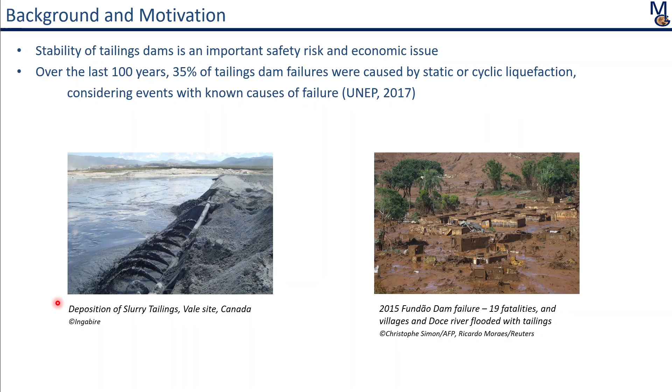And this is Emmanuel's work that I mentioned. We wanted to put a dollar amount to this, so we looked at how the assumed residual strength, if you assume liquefaction will happen in these tailings, what you can count on after liquefaction, how that assumption, which is a big question, affects the cost of remediation.

We looked at putting in a toe berm and stone columns, and for 100 meters of a dam, that's $1.5 to $2.5 million. That's an actual project, 3 estimates for cost, and that's millions of dollars. So some adjustment in that one parameter can make a big difference to the bottom line of a company.

This is kind of an old schematic of all the research I do. I've got to update it at some point. There are 2 lines of work. Basically, we look at liquefaction response. We start from element testing, modeling, and then eventually we get to some sort of a liquefaction strength against the state parameter.

On the second line, which is the main focus of the talk tonight, we look at in-situ tests. Again, going from lab testing to modeling, all the way to connecting the measurements of CPT in this case to the state parameter. And once we have those two, we can eliminate the state parameter from the equation and connect the liquefaction response directly to the CPT measurements.

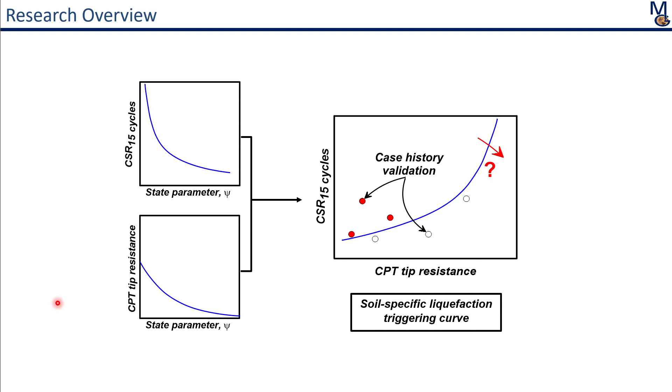And once you get there, you can also look at case histories and see if all this modeling and assumptions that you did amounts to predicting anything real. Would the past failures and not failures corroborate your findings?

I'm sure you all know this, it's 2023 and we're in Vancouver, but just for a reminder, the state parameter is the difference in void ratio from the critical state line. If you shear soil, eventually you get to critical state where there's no more dilation or contraction happening. And if you look at your current void ratio minus the void ratio at the critical state at the same confining stress, that is the state parameter.

If it's negative, if you're below the line, if you're denser than the critical state, your soil is going to dilate to failure. That means you're going to have some extra strength that you can count on. And if you're above the critical state line, positive state parameter, your soil is going to be contractive. You're more prone to liquefaction.

That's a big concern. On the right, you have manifestation of the critical state on the stress space. You have shear stress essentially on the vertical axis versus confining stress. The slope of this line between Q and P is M, the critical state friction ratio, which is equivalent to a constant volume friction angle. And M of 1.2 is equivalent to a phi CV of 30 degrees.

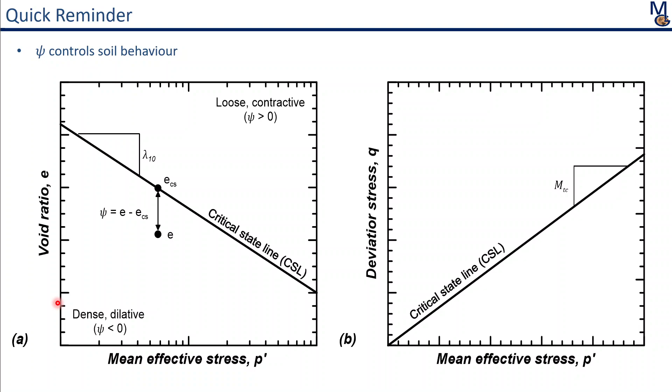That's kind of the rule of thumb number that we go with. The way we do liquefaction assessment is you go to the field, you push the CPT, you estimate the state parameter from mainly the tip resistance, and then you use some correlation between the state parameter and liquefaction resistance, whether triggering, residual strength, or something else, and use that to design or assess the conditions of your site.

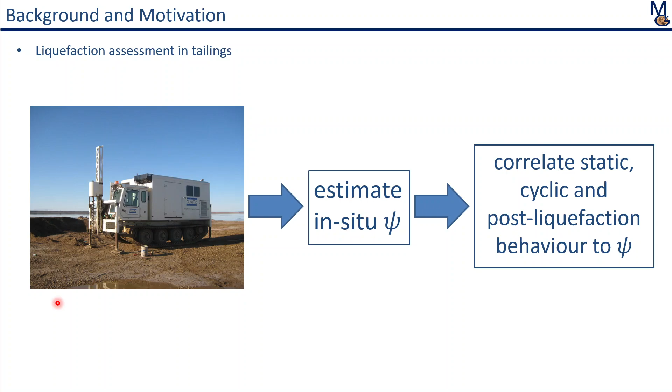This is the outline of the talk. Basically 3 parts to it. I'm sure I'm not going to make it to the 3rd part. It's a bunch of cool research stuff I put at the end. If anyone was interested, they can look at it later.

The first part is the main part of it. It's about CPT. I'm going to start with drained CPT when we do CPTs in sand. And then I'm going to give you a pretty good method ready to be used, and I'm hoping someone will pick it up and try it out and see if it's crazy or not. Then I'm going to pose some questions about partially drained penetration. That's where the big problems are. I don't have the answers, just more questions and things to think about.

And if we have time, I'll get to show some of the second part of the liquefaction assessment, how state parameter relates to some of the liquefaction resistance properties, out of the work that we did. And we're gonna close it off with that.

So the first part is, why would we need a material-specific CPT interpretation? What's wrong if we just have a general correlation and just use it?

So this is a database of calibration chamber tests. You have a big tank, 1.5 meters or so in diameter, fill it up with sand. Everyone can hear me, right? I'm a bit away from the microphone.

And you have uniform clean sands, as easy as they come, and you do some CPTs in there, and you correlate the state parameter, which you know because you prepare the sample, you know its weight and volume. And you correlate that to the normalized tip resistance. You normalize for overburden stress.

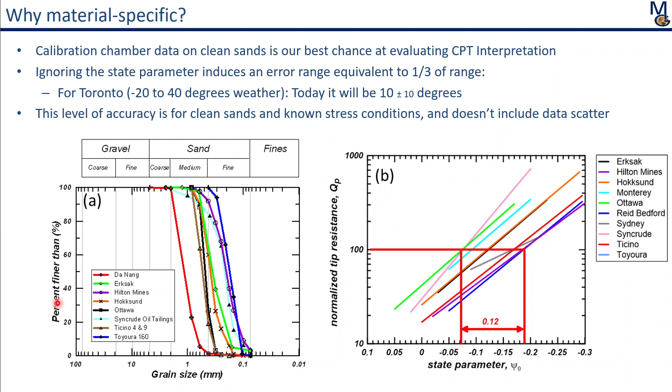And I'll show you some examples at the end, which is pretty close to that. That's where we are still. To get better than that, then you need to know which one of those lines you're on, basically. Right? So that's a big chunk of that uncertainty that you can deal with.

When we started, we looked at some of the existing methods. Those of you who do this every day will recognize some of these methods. And we wanted to see how they do on that very same calibration chamber database.

This is as low a bar as you can have. Most of these methods were calibrated against the same database or a part of it. So we just looked at how they can recover the state parameters that we knew in the database if you feed them the database. And we plotted the results on the histogram.

Basically, the error is on the horizontal axis. So you want everything to be right here at 0, no error. And statistically, you want that bell curve to be sharp and centered in the center.

3 of these methods work fine. They're basically the progressions of what the late Ken Been started with Mike Jefferies, and then the Plewes et al. method came along, and then the cavity expansion was an extension of that. The widget that some of you guys use is an extension of that. And they do fine. If you were looking for one standard deviation, it's plus or minus 0.06 or so. But it's centered around the middle, and there's no bias.

2 other methods that we looked at have big problems. One of them is the equations that's in the Been and Jefferies book. I don't know why, because they were trained on the widget, basically. They should recover the widget results. They don't—that's the brown line. It has nothing to do with the middle. It's kind of unconservative most of the time.

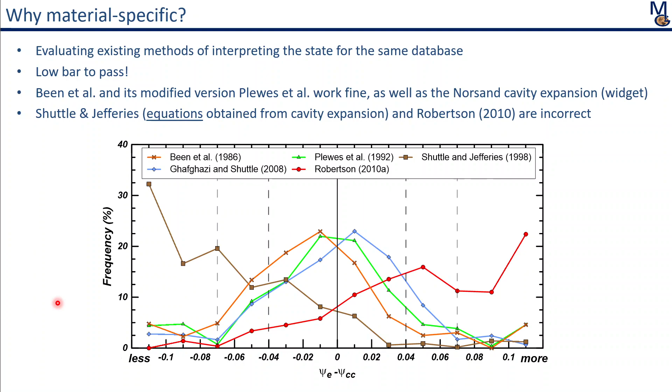The other one is Robertson's equation from 2010. That one didn't do very well either. It tends to be on the conservative side, and it doesn't really capture anything in the middle. So you're probably better off just assuming a state. And this is a very low bar—this is as easy a test as you can do on this.

So if you wanted to get to a material-specific one, do a little better, then you have 2 ways. You can do calibration chamber tests, which are difficult and expensive and messy, or you can be happy, like Mohammed here, and do CPT modeling. Doing CPT modeling, creating a model is very difficult. A lot of people, including me, have been trying for decades. But once you have a model, it's easy to use.

And you can go one step further, and you can come up with some simplified parametric equations, which you can basically use in Excel. We do both in my group: we use calibration chambers to validate the model, and we use the model to extend what the calibration chamber test can tell us.

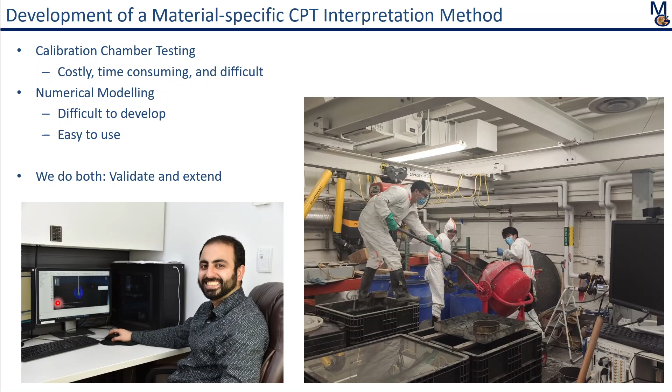To model the CPT with Norsand, we needed to pick a good software that could do this. Norsand is implemented in some platforms, like FLAC and Plaxis and others. None of those can do CPT modeling because they cannot deal with those distortions you can see in the mesh. CPT is a very difficult problem to model.

We picked Norsand as the model to represent soil behavior because it can do a good job. It's relatively simple. It has good penetration, especially in the tailings industry. It's becoming kind of the go-to model. And I was trained on it, so it was kind of natural as well.

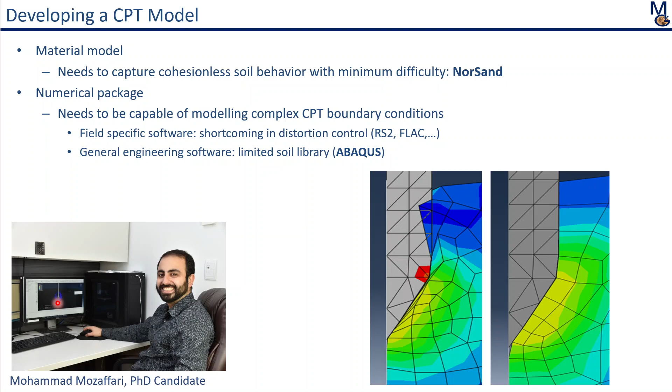So we did the other thing, which is implementing Norsand in Abaqus. That was a good chunk of Mohammad's work. We verified it, so you want to make sure your implementation was okay. This is comparing the results, loose and dense, drained and undrained, to the VBA that is in the Been and Jefferies book. So the implementation was okay.

Now that you have the model, you first want to calibrate it. It's forward prediction. We're not trying to do any monkey business going back and forth and trying to adjust the model so we get what we're hoping for. So you get a handful of triaxial tests, 6, 7, 8, something like that, and you calibrate, you get the critical state line, and you calibrate Norsand to it.

There are 5 parameters you're looking at calibrating: the critical state friction ratio, which is like a friction angle; the slope of the critical state line lambda, which represents compressibility of soil; elastic stiffness, which you can get with bender elements, or in the field from a seismic cone; chi, which is a dilatancy parameter depending on gradation and fabric; and H, a hardening parameter that depends on fabric. All of these are material specific.

Once you do that, you do your model, then you want to validate it. So I'm going to show you some validation. Once you have a model that you know works, you can use it to create some equations, do a parametric study, and figure out an interpretation scheme based on these parameters that you can always calibrate. This is the model — we're modeling our own calibration chamber, essentially.

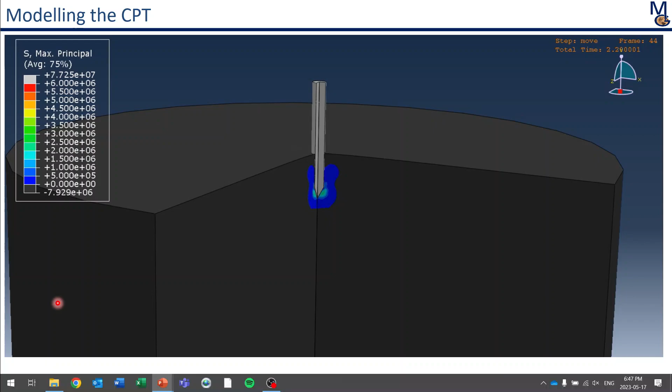This does go more... somehow paused. Oh, everything's locked here. How old is this laptop? Sorry, guys. I'm going to wait, give it the benefit of the doubt. That's easy. I'm holding the clock. Oh, there, you made it. No, just go back, it doesn't matter. Go to the next one. There. Next one? All right. Yeah, let's not risk it.

Okay, so once that model runs, you basically get a CPT profile. These are drained penetration, so we're not really developing pore pressures. You have tip resistance versus depth, and sleeve friction versus depth. You see the response to the state parameter, basically loose, medium, and dense — the tip resistance goes up and the sleeve friction goes up.

On the right, you see the normalized tip resistance against the state parameter. We normalize the tip resistance from the CPT by subtracting the total mean stress and dividing by the effective mean stress. That's QP, the way this is typically done. Then you plot it against state on a logarithmic scale.

What you see in that figure is one of the biggest databases of calibration chambers on Ticino sand, from Italy. A few people worked on that over a decade or so. These are also the models of those same tests, and you can see that's basically the same range with the same amount of scatter. Scatter comes from different reasons, but it's pretty much not distinguishable between the two.

So with this model, you can basically do the work that you would do with a calibration chamber, mind you, with drained penetration on sand. We repeated that for 9 sands, and plotted tip resistance against tip resistance to see how we're doing. It's on the 1-to-1 line. There is some scatter, and I'll talk about that.

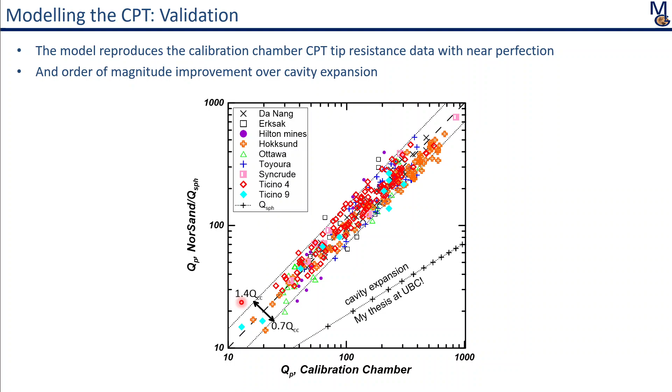This was a big improvement over what we were doing with cavity expansion. That's down there, my own PhD thesis - that's what the widget does basically. This is an order of magnitude improvement once you go to the real cone model.

Some of that scatter comes from the calibration chamber data themselves. This is back to the Ticino database. Those two red ones are two identical tests, same density, same stresses. You can see they're about half of that range of scatter just by repeating the test. So a good chunk of that scatter just comes from the actual calibration chamber data. It's a very difficult test to run, very difficult to get good results.

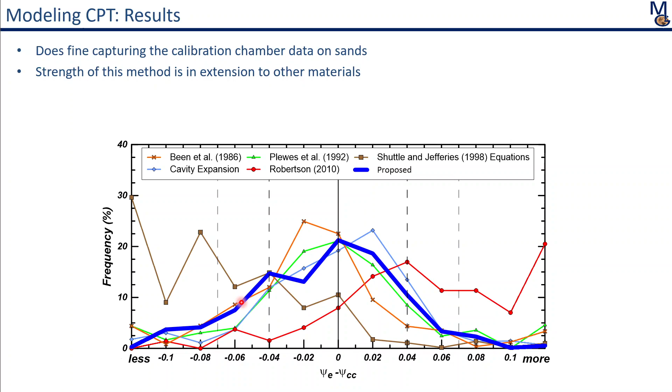That's how that model fares against the rest of them. It's pretty comparable to the good ones, kind of centered around the middle - not better, not worse - and you can't really get better than the database. The point of something like this is being able to extrapolate beyond the empirical database, because now you have parameters that you can measure and account for differences, so you're no longer limited to the database that you train things on.

We also looked at the sleeve friction. This is a chart we use to estimate compressibility of the material from CPT data. You basically have the friction ratio from the CPT, kind of like the sleeve friction divided by tip resistance. People have found out, starting with Ken Been et al., that that's correlated to the slope of the critical state line. They had some data, David Reid added some data, which made that figure. Our data are the blue ones on there with the range of parameters. So very similar to field measurements is what we're getting from our model, which gave us a little more confidence about how this model is working out.

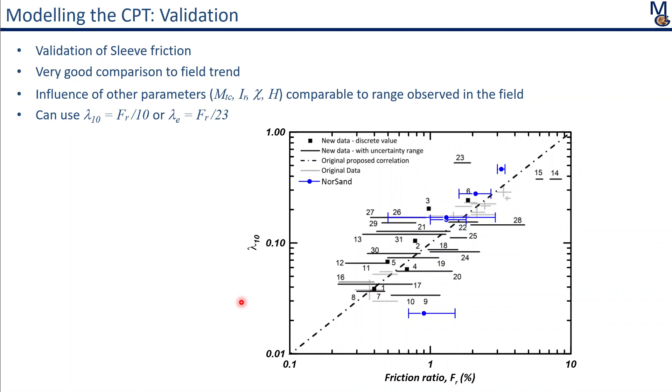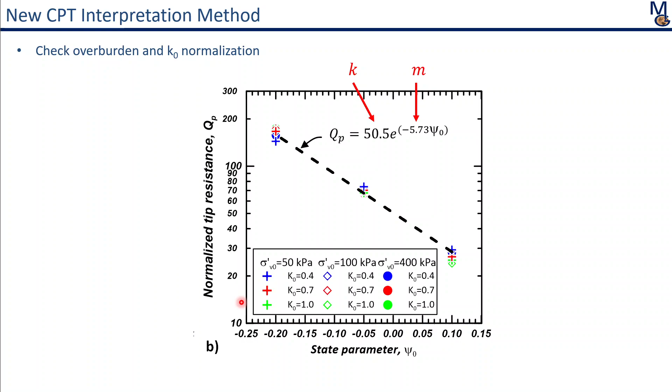If you fit a line to this, that line is exponential, and basically you get two parameters, M and K. These are the two parameters that we're going to try to get every time we're trying to get a correlation between Q and the state parameter.

Now I can go to Norsand parameters and investigate how each of them would change that interpretation correlation. This is an example of the critical state friction ratio, M. 1.2, or 30 degrees, is kind of the common assumption. What if it's lower, 1? What if it's higher, 1.5, which is common in tailings on that end? That can change that correlation - you can already see, if you start from 100, how much that can affect the interpreted state parameter.

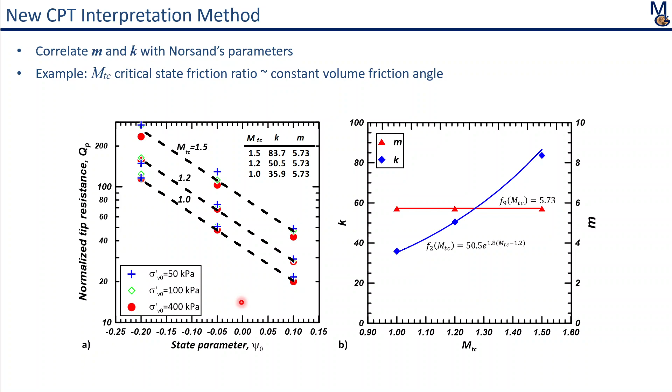Now I can fit some lines to that, M's and K's, and in this case M didn't change, so the slope is the same, it just shifts up and down, and that's what K does. Then I can plot that against M and get two equations there, and now I can use those equations to recover how the correlation is affected by the change in each of the 5 Norsand parameters that I'm looking at.

Norsand has a couple other parameters, the Poisson's ratio, and a plastic unloading N parameter - those we found out do not affect anything, so we don't need to worry about those. The 5 that we do need to look at follow the same structure of equations that Shuttle and Jefferies used. This is just an update that seems to be working.

Once you get all of those parameters, you multiply those, divide by the base values, and that will give you M and K - now you have a correlation. It's a big table, but this is something you can put in Excel, 10 columns of stuff, and you can get your correlation. You will end up with some iteration because a couple of these Norsand parameters are functions of the state parameter again - H tends to be a function of the state parameter - so you get a simple iteration in Excel, and that will solve it for you, no problem.

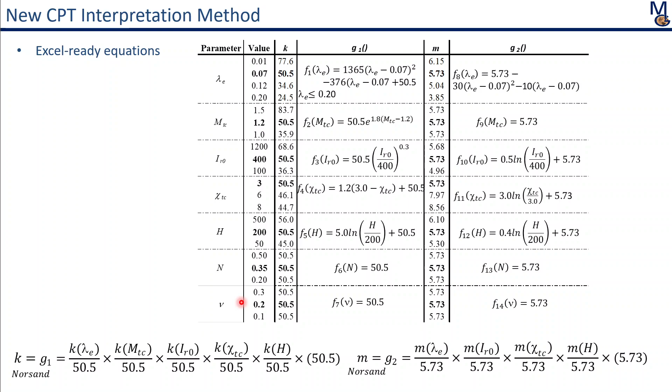I did put in an empirical fix. It's always needed to get good results. So we divided K by half — this is relevant when you go to the field and use a seismic cone. This is when we were doing the calibration chamber database; most of them didn't have good elastic parameters, so we used one that was kind of on the low side.

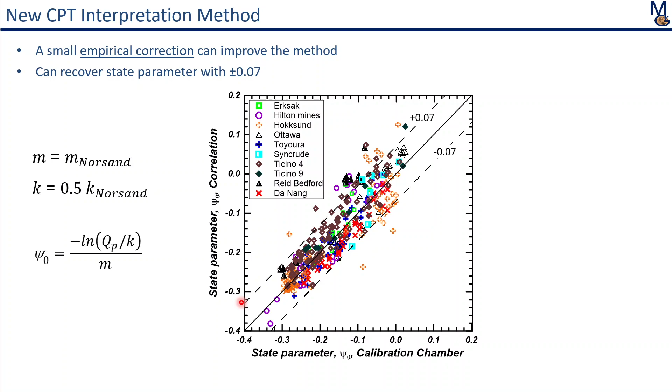If you want to go straight with a shear wave velocity measurement in the field, then you need this empirical correlation. This makes everything clean, no assumption, no funny business — you can just go with your measurements. And that's how this recovers the calibration chamber database. There's still that scatter, plus or minus 1 sigma roughly, 0.06, 0.07 around it. And that's how you can do this.

The thing that this method does, which I really like, is that very easily you can also assess the error that not knowing these parameters can cause. So whether you didn't do the triaxial test that you should do to get Norsand's parameters, or if you know there's some variation in the field because of gradation changes, deposition changes, all sorts of reasons — you can very easily change some of these parameters and see how that affects your interpreted state parameters. You can do a quick sensitivity analysis and get a sense of the risk you're taking by not knowing a certain parameter very well.

What I did was go for the whole span of parameters you could have. So m goes from 1 to 1.5, lambda goes from 0.01 to 0.2 — a big range — and I ranked these parameters. You can see lambda is the big one; it has the biggest effect, and that's what Ken Been picked on empirically back in the 80s. Plewes et al. came along and picked on m — they realized m has a big effect, so their equation has m, the critical state friction ratio, as something that needs to go in.

And then in 1997, Shuttle and Jefferies, in their cavity expansion model, picked on IR, the rigidity index. You can see these are the three that have the biggest effect on the interpretation, and that's what comes out.

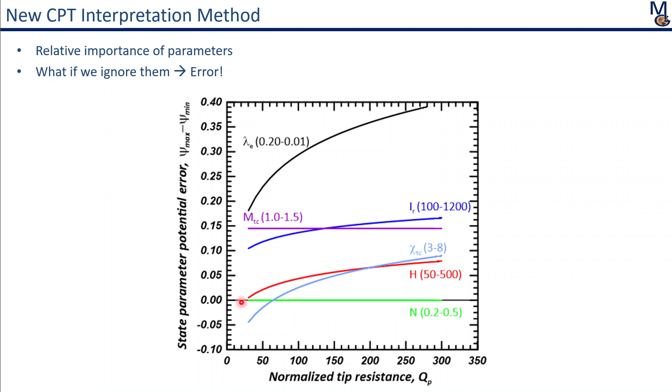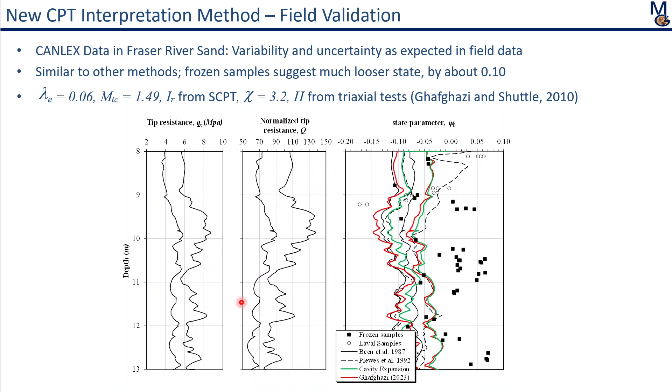That's something we could discuss later. But at least this is doing the same thing other methods are doing. We were doing this for tailings.

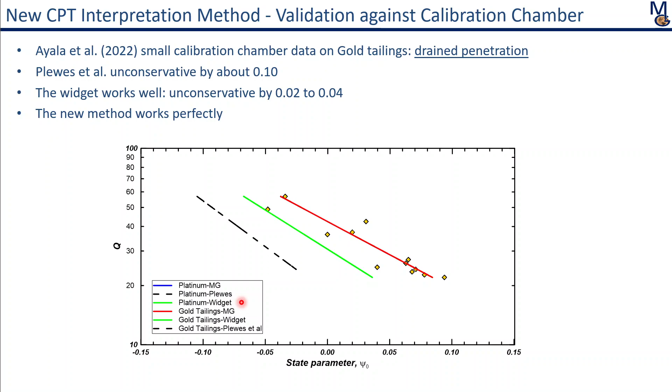That's what the widget does, and this is what the equations do. I think that's a bit lucky—I didn't expect them to do so well. But they do fine. They're doing at least as well as the widget does, and they're easier than it.

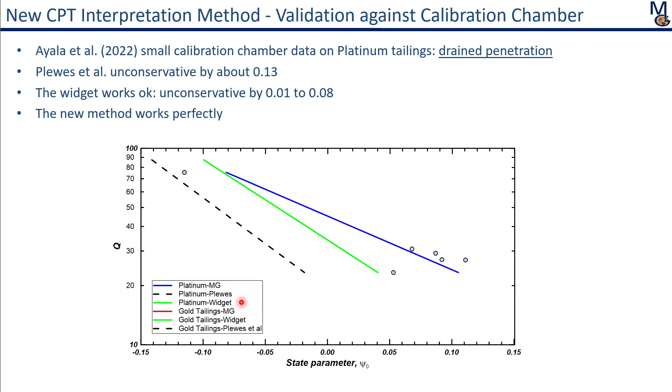This is the platinum tailings, same story. That's the widget, and this is how these equations are doing. So they do really well in drained conditions, and they're doing fine in tailings. So Plewes et al. is a good method—you've got to put in the right numbers.

If you don't put in the right numbers, you're adding to your error. It's good for screening level, quick—you get some estimate. The widget is good, I'll come back to the widget shortly. But you do need to calibrate to NorSand for the widget. And these equations are at least as good—they're easier than the widget. There's nothing you need to run.

And the good thing about them, even if you didn't calibrate to NorSand, you can estimate how much error you may have by looking at the range of probable parameters that you're looking at. The other methods that we looked at, I wouldn't use them on tailings.

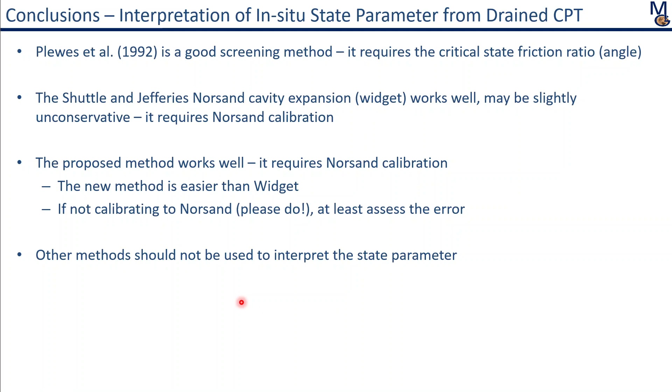Now, the big one: partially drained CPT. So these are all great—there's a great method, some answers there, some improvement, making life a little easier. Now I'm going to make life difficult again. This is stuff where it's a discussion—I don't have any good answers here, just more questions and stuff to look at.

So, one case study. This is something in a gold mine somewhere in Canada. Some of you may recognize it or not. ConeTec did some really good work—they did different rate CPTs, and some very good sampling. This is piston sample with air injection at the bottom to cut off the sample and fight suction.

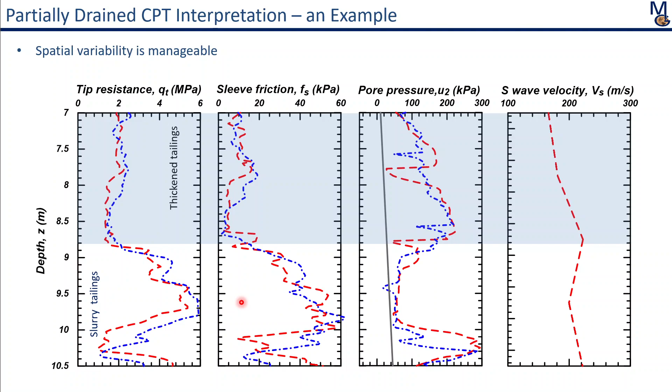The site is relatively uniform as far as tailings go. The upper part is thickened tailings, so they changed the process—you get thickened tailings on top, very uniform and nice. Below about 9 meters or so, this is traditional slurry deposited tailings, so there's more variability there.

My first reaction would be, yeah, but how good are they? And that's something I'm going to explore a little more. The bottom seems fine—there's some spatial variability, I'm sure, everywhere, and probably some at the bottom, but there's no big question there, at least as far as the Plewes method goes. I'll get back to that as well.

So why are those so off? Why are the samples saying this is a very dense material while the CPTs are saying it's contractive?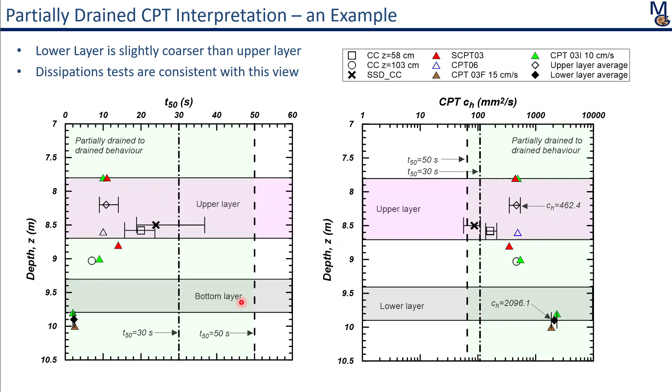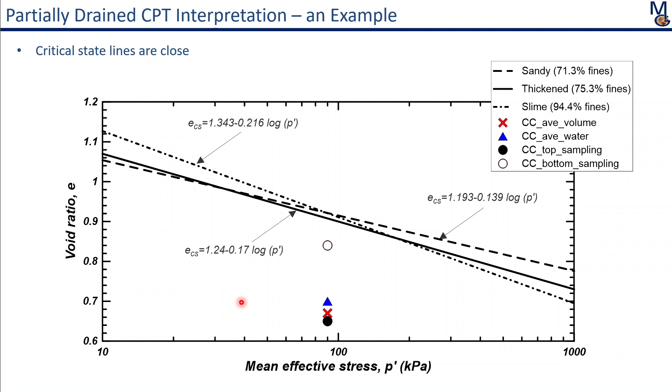The critical state lines are fortunately pretty close. This is testing that we did and that WSP did. They're turning out to be pretty close, and where those samples are and where we did our work, they kind of meet. So there's not a big question around where the critical state lines may be. We're still going to investigate this some more, but they seem to be pretty close. That's at least not one of the variables.

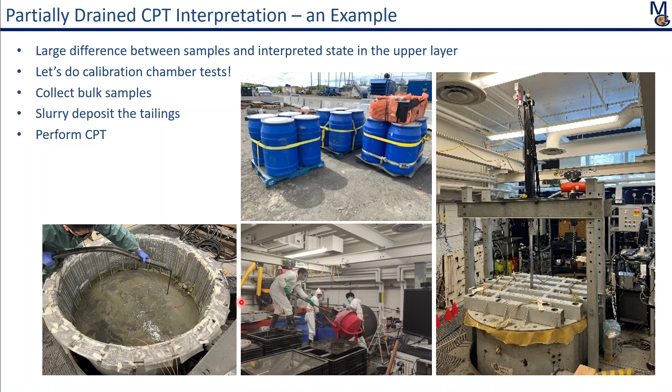So what do we do when you have that big problem with the samples not matching the CPT interpretation? You do some calibration chamber testing. You collect a lot of tailings in those big blue drums from the site, and you bring it to U of T, and that's our chamber. You get some great students to work on it, and then you push a cone in it.

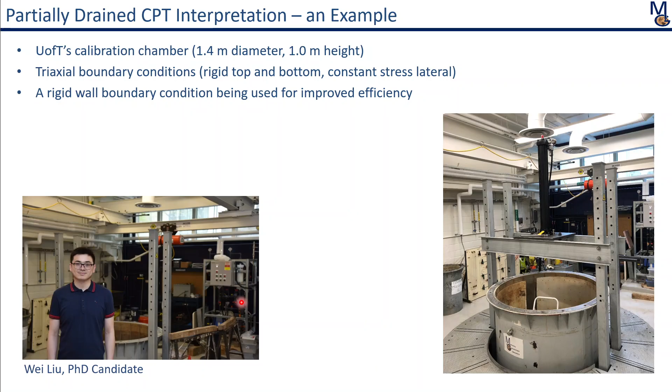That's the guy who's leading that work, he's graduating soon. Our chamber is 1.4 meters in diameter, this is Golder's old chamber from Calgary. We shipped it there and built a lab around it. It's 1 meter high, and you can apply triaxial boundary conditions, basically a membrane around it, and vertical loading, and then push a cone. What we're using instead is rigid walls, we just didn't want to deal with that horizontal vertical membrane, less leaks and stuff. It's hard as it is. So we're doing it like an oedometer, vertical load and a rigid wall. We're measuring horizontal stresses, so we know K0. Do not worry, Adrian.

That's the gradation of the calibration chamber samples that we got. It's finer than both of these materials, kind of on the upper range of the thickened tailings. So it's a little finer.

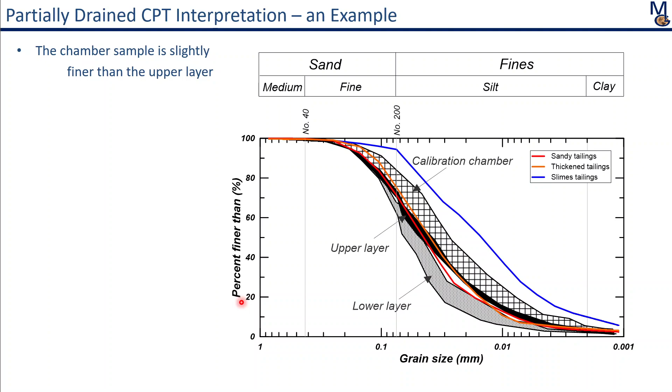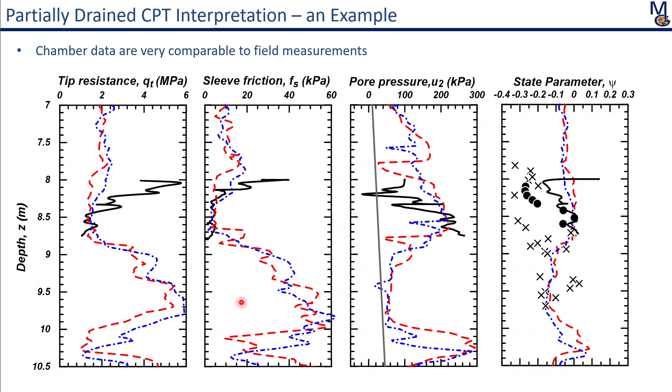So very consistent results from the chamber. That makes me not quite throw out the sampling that was done in the field. I don't have an answer for that difference, but I do have some interesting stuff to look at. That's a question to be answered. Why is that happening? Now, if I come back to the CPTs, we looked at some different rate CPTs.

Their CPTs at 0.2 centimeters per second, that's 1/10 of the standard rate. Their CPTs at the standard rate, 2 centimeters per second, at 10 and at 15.

What's very interesting is if you look at the fast test, let's look at the upper layer. This is the one that developed pore pressures in the standard CPT. When we did the slow test, the tip resistance went up. There's a question with the pore pressure there. But if I interpret that, this is now the slow test I'm looking at, the orange one. Tip resistance went up when we slowed down.

So this is now pushing this CPT towards drained. We're killing the pore pressures, so pore pressures are low. We're removing that partially drained question. And what happened is, if I interpret that—and this is back to clues, I'm going to come back to looking at my method—but you go across the line. This is no longer considered to be liquefiable. And if you look at all the other ones, which are the standard rate and all the faster ones, they're still considered to be liquefiable.

And this is basically because our normalization is not working. We're not doing this partial drainage right. Depending on the rate, we're getting a different state, and this is driving the project basically.

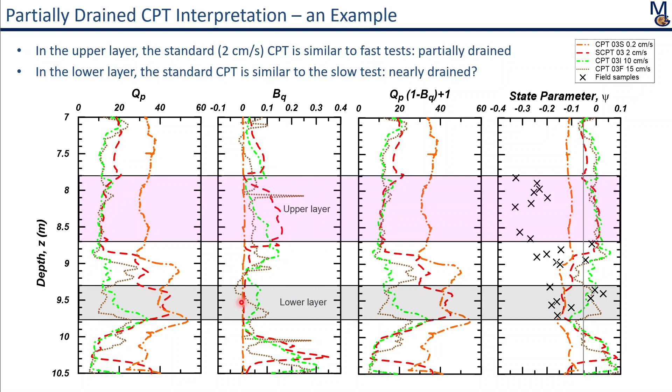So we went a long way, and luckily we had picked on at least half of this to be liquefiable. So basically what my method is telling you is that, yeah, this is probably all liquefiable on that side if you get rid of the partial drainage problem and then do a material-specific one.

And this is consistent with what we saw in the chamber tests from that gold and the platinum data from Ayala et al. Again, the Plewes' was kind of on the unconservative side by about exactly that same amount. This is another gold tailings, and this is exactly how much difference we're seeing on that side of it.

Now, why are we so far from those samples? I have no idea. We're going to do more calibration chamber tests. I'm going to take the calibration chamber material and try to determine its critical state. Maybe that's somewhere else. That's an open question, at least as far as I know.

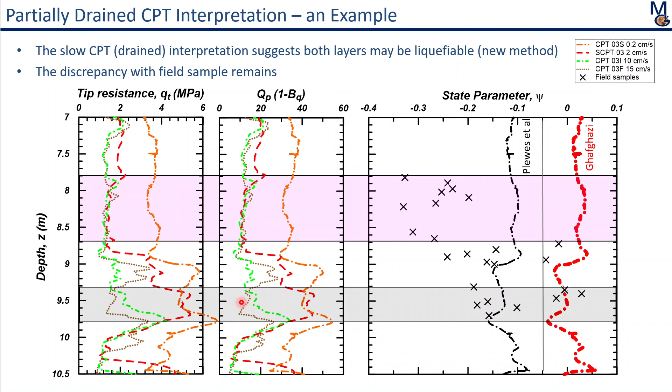One last summary slide on that, then I'm going to skip through a bunch of things so we can finish on time. This is a summary of all the data that I showed you from the site. So you're looking at the upper layer here on the left, the lower layers on that side. This is based on the measured void ratios, the measured states.

And when you go up, this is kind of the drained test. Tip resistance goes up when you go to the drain side, which kind of confirms that you're in a contractive material probably. Remember, pore pressures were also positive. And then when you go towards the undrained side, you're lower. These black ones are the chamber data—very low compared to what we're getting.

Those are what the widget would give you, drained and undrained. So the widget's doing a decent job capturing that distance, the difference between drained and undrained. I think it's doing a pretty good job, but it's off like everything else. It's way to the right.

If you go on this tip resistances into either of these lines, you're going to get a positive state. So whether it's a problem with our samples and not knowing the critical state, or the CPTs, I don't know. I tend to always end up trusting the CPT and then be biased. But now I have chamber data, which is kind of also very reliable. I don't know, to be discovered. There is a problem.

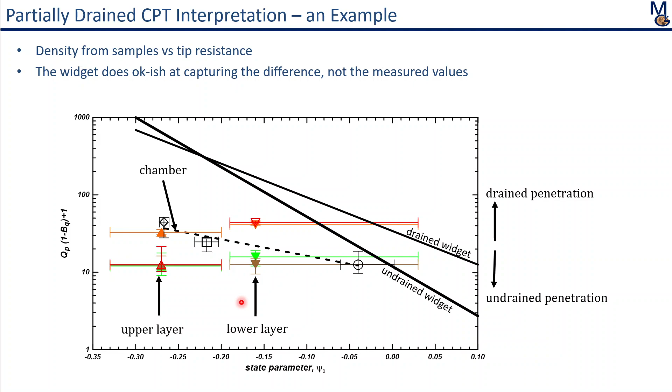The point there was that by missing partial drainage, at least in this one site, we can be off by 0.1 in the state, which is enough to put us across the threshold, so we'll change our decision. By missing the material-specific nature of interpretation, you'll also miss the state parameter by about the same amount. So both of these are important. Each of them is big enough that it can completely change the outcome of your analysis.

What really worries me is how easy it was to go from drained to undrained or partially drained penetration in a tailings, with the standard rate. And that's why I always like to see different rates of CPTs tried.

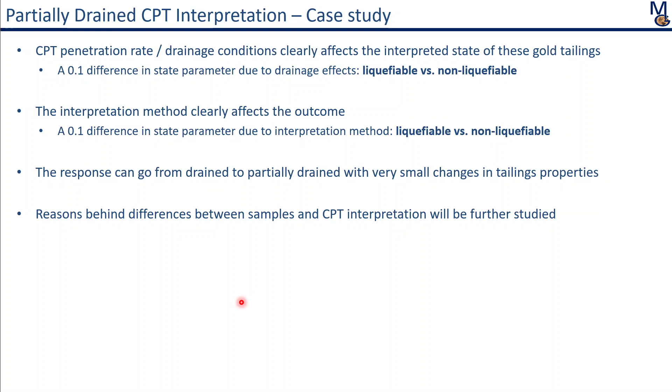Contractors can do this fairly easily. I would at least do 3 rates, find a test site and try them out. And some sampling gives you a lot of perspective. Now, I have this thought thing here. It's more of a discussion point. I'm going to skip it.

This is on partial drainage and where troubles may be coming from. I have some thoughts on normalization and whatnot. I'm not going to bother you with those things, but I'm going to emphasize doing more than one CPT rate. There's no way we can figure out where we are on the partially drained range with one number. No matter how hard we try, there's so much stuff going on. At least get 3. That will give you a sense of how much your tip resistance can change because of that.

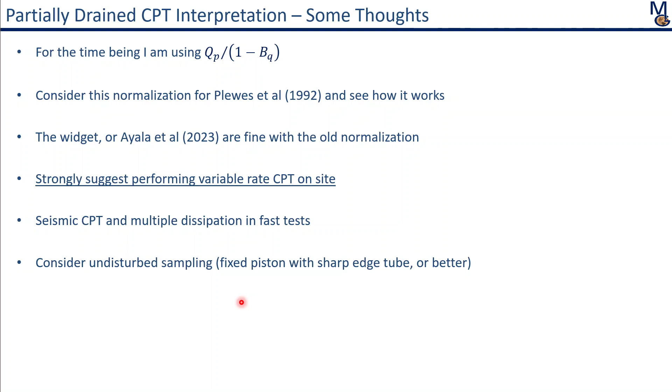Seismic CPT, we need elasticity. Obviously, always do that for good interpretation of the state. Then dissipation tests, because you need C sub H to figure out where you are on the partially drained range. And on the undisturbed sampling, even if the samples aren't great, it will still tell you so much. It's an anchor that you can tie things to.

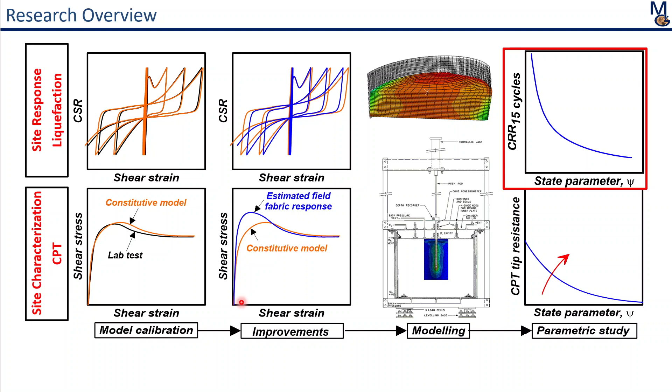So this is the second part of the research. This is quick, don't worry, we're almost done. This is now, I have state parameter. So if I go back to my initial plan, I figured out how the CPT tip resistance is connected to the state parameter. Now I'm going to figure out how some of these liquefaction responses are connected to the state parameter.

So we can kind of compare to what happened out in the real world. So we looked at a few things. I'm basically going to show you 1 or 2 slides out of each journal paper. These are coming out or are out already, so you can see more of those. Just again, seeding some thoughts without giving you a whole lot of detail on stuff. We looked at 2 sets of materials.

On the left, you see a natural soil. This is from a quarry in Huntsville. It's 3 hours north of Toronto to kind of get to where you can get materials. We got fine gravel all the way to fine sand. And then we mixed them and we created mixtures. I didn't want to mix kaolin and sand. I wanted to source them from one place so it's naturally reasonable.

On the right, we have tailings. So this is the base metal tailings from somewhere in Ontario. And again, we have the sand side, which is a fine sand, and we have the silt side, and we have 3 mixtures in between. And we ran a whole lot of tests on these.

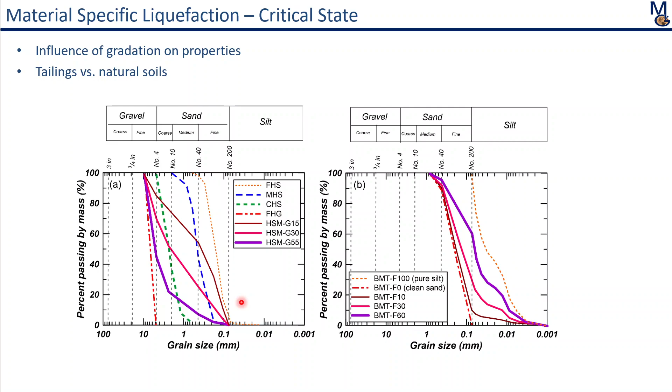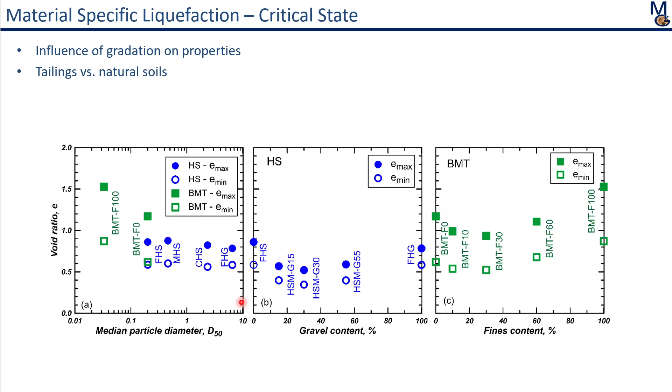E-min, E-max as a function of fines content or gravel content, and D50 - you can see the mixtures always have the most compact gradation. The silt and sand on the two ends, or the gravel and sand on the two ends, are higher. Those uniform ones end up having a looser compaction. So those mixtures are always the stiffest materials, the most compact ones.

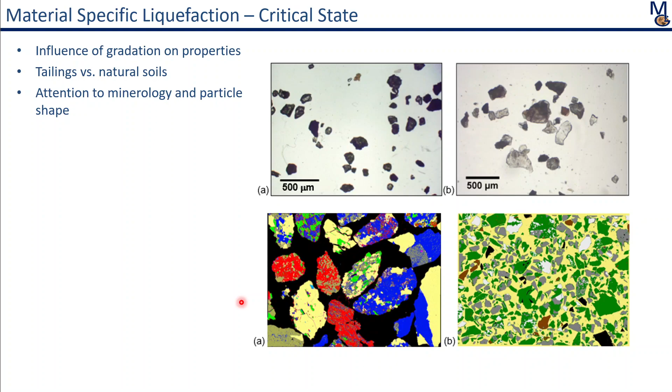We looked at particle properties, particle shape, mineralogy, because we wanted to make sure there's no big bias as you go from gravel to fine sand or from silt to sand. We didn't pick up on the silts being much more angular than the sand. We wanted particle size to be pretty much the only variable here, and that was pretty much confirmed.

On the left, you see how critical state lines changed in the natural material, going from fine sand to gravel - these are all the uniform stuff. These are parallel gradation curves, so the only difference is really particle size. They're scaled versions of each other. As you'd expect, the critical state lines are pretty much the same. There's no big difference among them - this is within the range of error, basically.

But the mixtures were quite lower. At least one of them, which was the most well-graded mixture we could get, with a bit of a humped gradation, was very flat. So if you're trying to do state parameter interpretation, that's the gradation that gives you the limit on stiffness. It's not the coarsest one and the finest one, it's not the top and bottom of the envelope - it's the one in the middle with the best kind of fractal gradation.

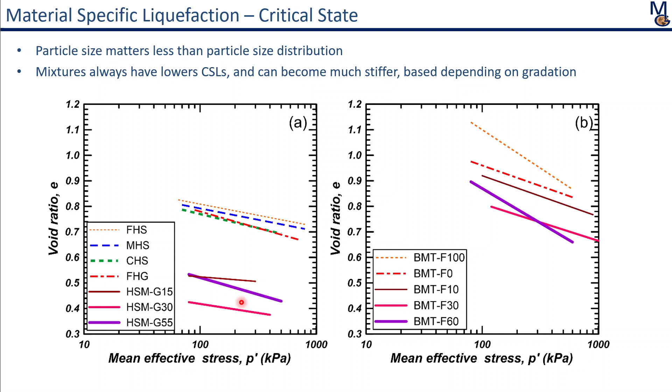On the tailings, again, the two dashed ones are the silt and the sand. The silt was higher - it was steeper. We know this: when you go to fines, they tend to become more compressible. But then again, the mixtures of them were lower - they were stiffer. So this is a problem if you're trying to figure things out in the field and envelope your properties.

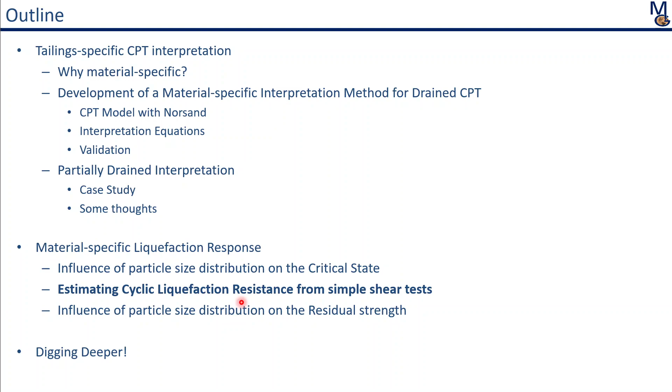The other thing we looked at was cyclic liquefaction resistance. This is Mathan's data - he's with WSP now.

Basically, cyclic simple shear testing to liquefaction, 3.75% strain for liquefaction triggering, and after that we did a post-cyclic monotonic test. The numbers I'm going to report as residual strength are all taken at 20% strain from the end of liquefaction. So it's not a real residual number, it's just a consistent number that we picked.

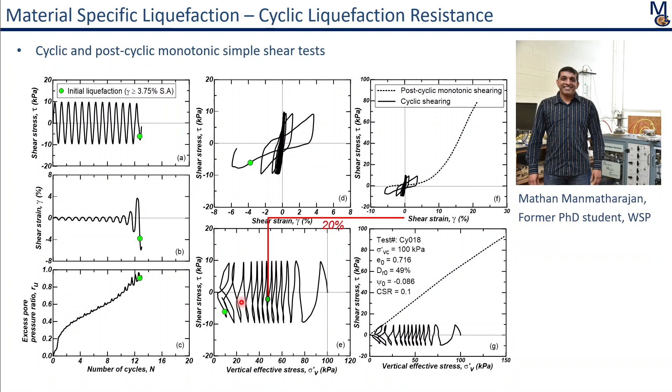Oh, this one's right now. Great, I don't know what happened there. So that's how we picked it, just to be consistent.

You see this material is dilating - there's no real residual value there we could pick.

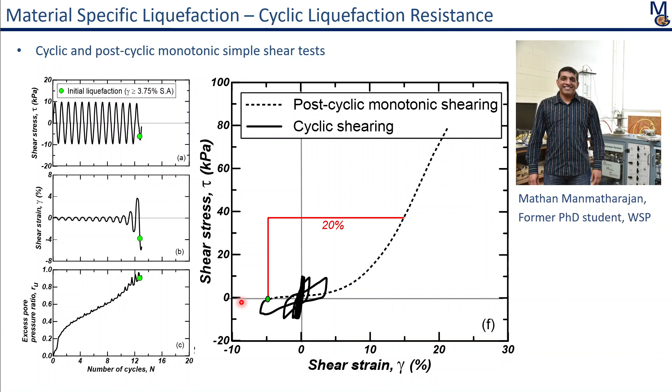This isn't just our data, there's a lot of data here - all the mixtures and stuff we could find where we had all the parameters and trusted the source. So this was an interesting thing. I do a lot of simple shear, and I haven't given up on it, but it made me think about it, since it's the reference test we go to when it comes to things like cyclic loading and liquefaction.

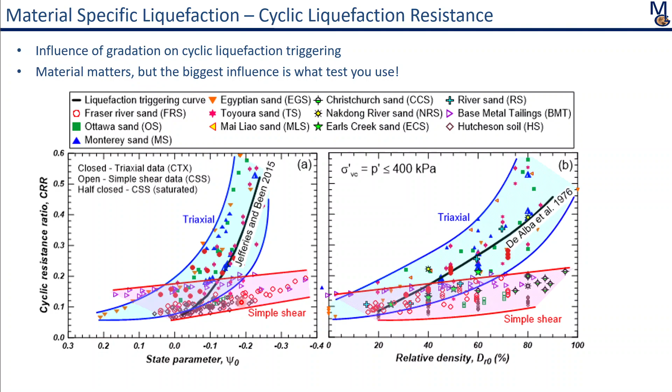It's quite challenging. Last of these is the residual strength. Again, without going into a lot of detail, we're looking at those same materials. This is the Idriss-Boulanger database of residual strength with their curves on it, so a lot of you are familiar with this. All I did is take that 20% reference number - it's not the real residual strength or anything - and we looked at all those different gradations and what they produced, and threw it on top of this. We converted our densities to CPT tip resistances based on equations in the monograph.

And this was interesting. The shape of the curves coming out of the lab tests are very consistent with the shape of the curves that these guys drew and everyone uses. So that's one thing. The other is that the lab data do not really disagree with the field data.

You can see some of them follow a lot of this. These ones are kind of aligned with it. There's no real disagreement among them.

And the way I see this, you can see here in the tailings, for example, the sand is on the strong side, the pure silt is on the weak side. If you look at this, the gravels are kind of on the strong side, and the fine sand is kind of on the weak side of this.

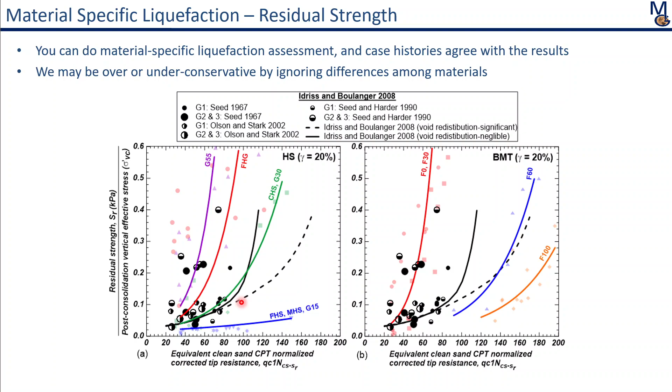I don't think this is something you want to just pick and use right now. But I do think that running those tests and putting them on the background of the case histories will at least give you a sense of whether the material you're dealing with may be on the better side of things or the worse side. You can kind of gauge your conservatism. If you understand how your material may be different from other materials, I think that's kind of interesting.

So to wrap it up, most of these parameters are material specific. These materials are different, they're not all the same thing. That's driven by particle mineralogy, particle size, particle shape, all those things.

High quality sampling and lab testing, even if we don't end up using it directly, I think can be very useful, calibrating to things like Norsand, just getting a pail of material from the site, reconstituting some samples. That's maybe $10,000 to $15,000. A lot of companies have their own lab. I think it's worth doing on a lot of projects. I don't see why we wouldn't do it.

If you have a range of gradation curves and you're trying to pick two to test, the top and bottom envelopes are not necessarily the best ones. You may want to pick one of the mixtures - they tend to be the stiffest ones - and then one of the more uniform gradations, probably the weakest one. If you want to envelope your properties, it's not just fine end and coarse end.

Constant volume cyclic simple shearing and monotonic simple shearing are quite challenging. I have a ton of slides I could share and spend hours on simple shear - we're spending a lot of time on it. But it's a challenging test, it's not a trivial test. Doing a good one is hard, and even when you do one, understanding what happened is not trivial.

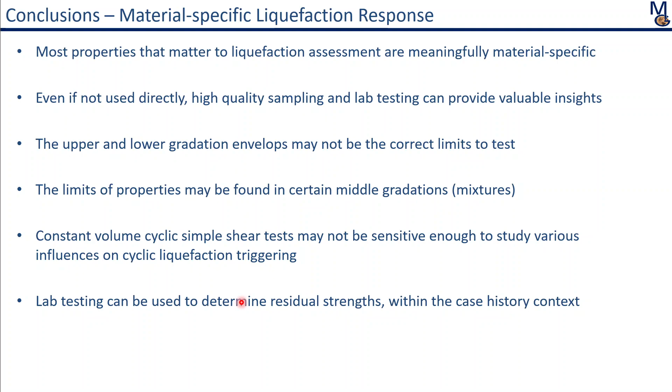The stuff I showed you, I've been collaborating with Professor Mark Talesnick out of Technion, and he has these sensors that are super cool, and we're doing a lot of cool stuff with them - measuring horizontal stresses is one of them. Alex C has been great in helping me, he trusted me early when I started at U of T, and that mattered a lot. And ConeTec has been a huge support, both funding and equipment and thought and everything.